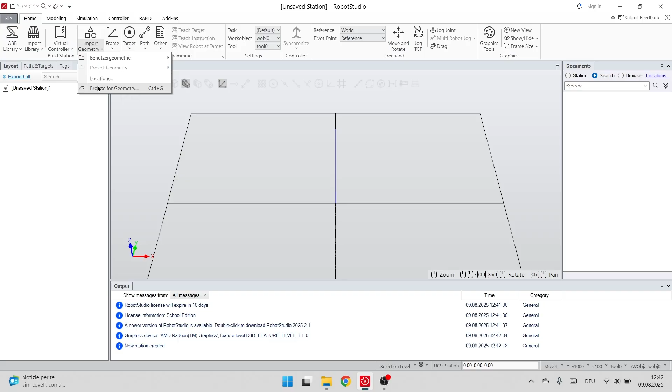In this video I will show you how you can create your own gripper. So let's create a station. Then you have to download the gripper from Sakai in the resources folder, and then we go to the import geometry here. Then browse for geometry. It's this one here, it's a .sat file, and open.

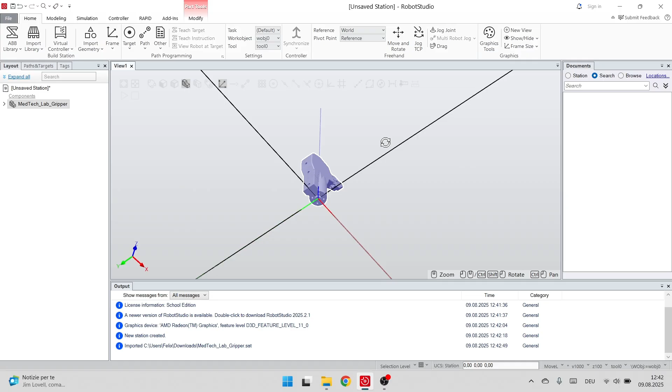For this gripper, the orientation of the origin is already right from the file itself, but maybe when you create another gripper, you have to adjust the origin as well. You can see how that is done in other videos, how to create libraries.

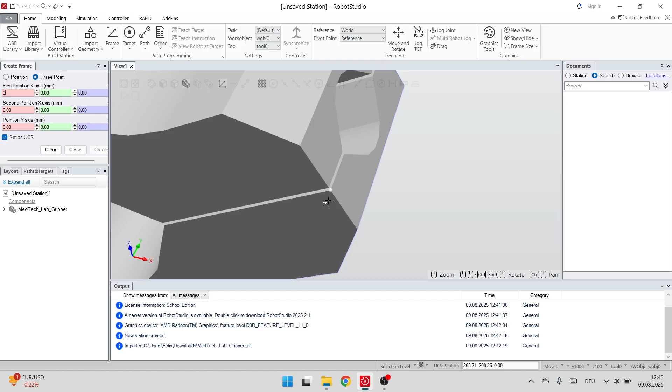Then we will create a frame from 3 points, and we will make the TCP1 first. So let's zoom here, 3 points, and we select this here. And now we want the x-axis to point downwards and the z-axis to point outwards. So this is the x-axis and this is the y-axis. Create.

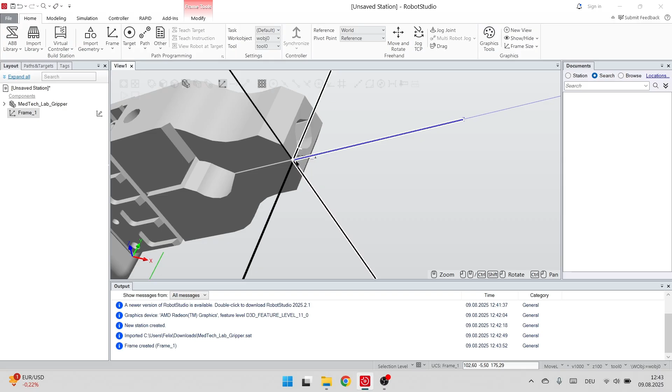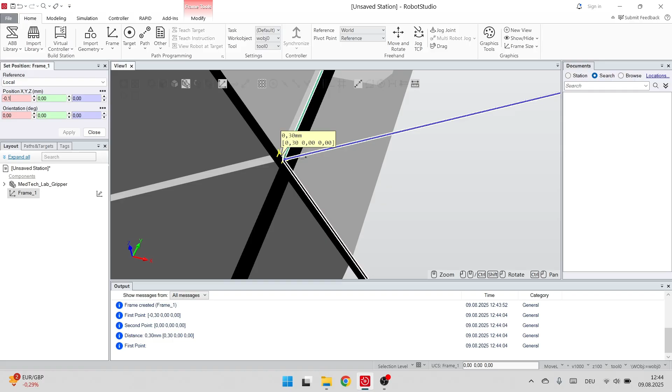Okay, now we have to adjust the position. Let's measure how far these two are apart from each other. It's 0.3 millimeters, so we have to move the frame in the negative x direction by minus 0.15. Apply, and now it's in the middle.

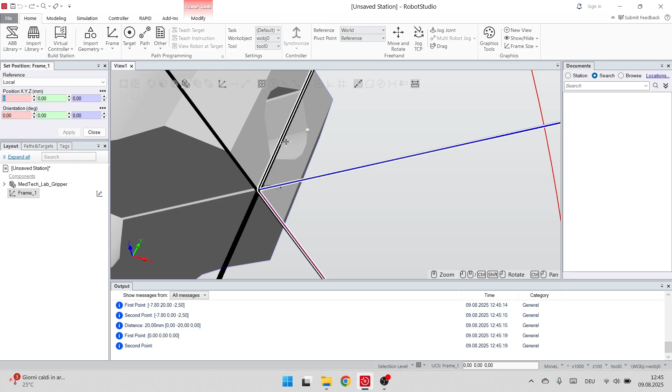So the fingers, let's measure how wide the fingers are. They are 20 millimeters. So let's move the frame into the positive y direction. We choose local because we want to move in the coordinate system itself, and here 10 millimeters, and apply. So now the TCP1 is in the right place, and let's move on to the TCP2.

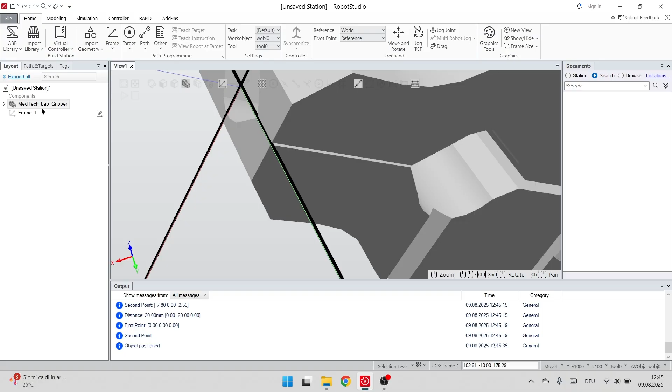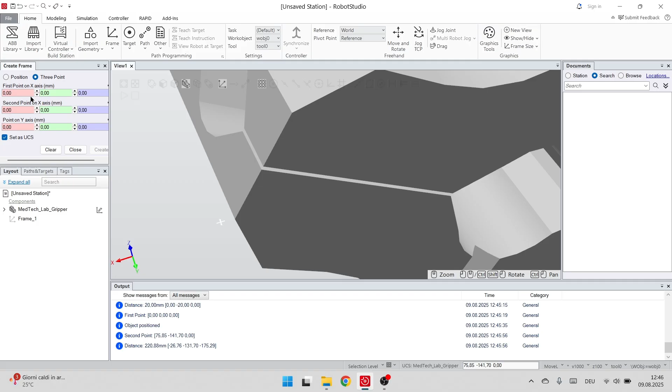I will hide this one here so it's easier to see, and put this as UCS. Okay, then create again a frame from 3 points, and in this case we want the z-axis to point in this direction and the x-axis to point down. So again, x-axis, and the y-axis, I don't think we can do that, so we have to rotate it later.

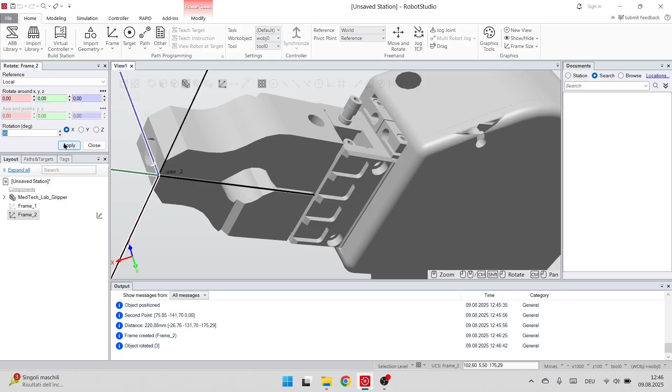So now we rotate around the x-axis for 90 degrees in this rotation. Okay, then we have to move it up again into the middle, so that's again minus 9.5 here. And now let's measure. Make sure you have activated the frame as a UCS.

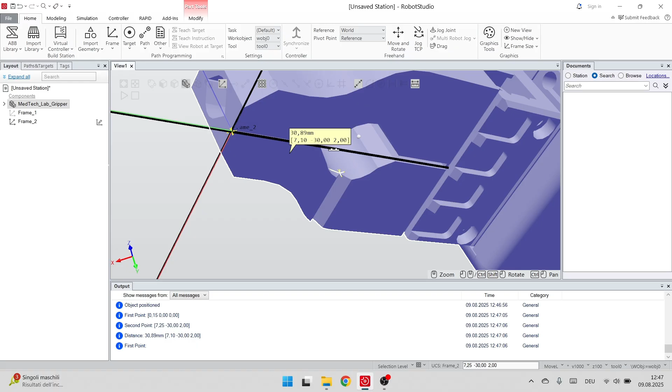And now let's measure from here to here, and we can see it's minus 30 in the y direction. So we have to move the coordinate frame minus 30 in the y direction. Again, local minus 30. Apply. And now you can see here

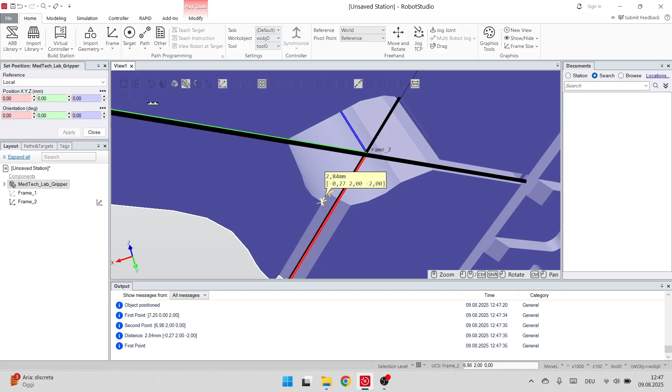this is exactly where the x-axis should be, and this is 2 millimeters inward here, but we will measure it here. Now you can see it's 2 millimeters, so we move it into the z direction 2 millimeters. Okay, and go here again, and 2 millimeters here. So now also this is in the right position. And now we will move on with creating the TCPs.

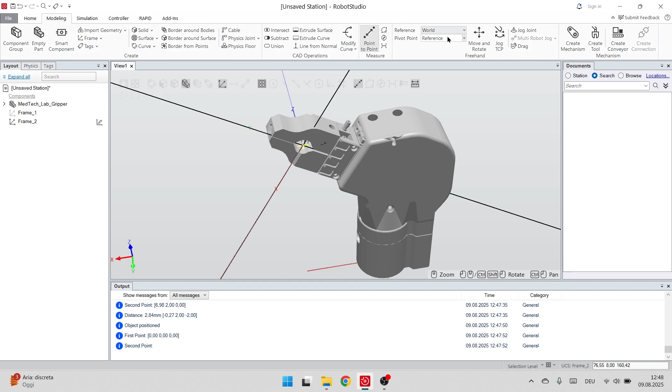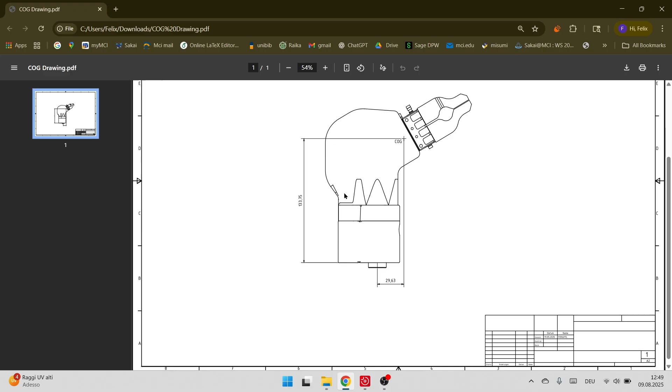So go here to modeling and create tool, and give it whatever name you want. And use existing, and this one here, the mass is approximately 0.4 kilograms. For the center of gravity, we can look at the drawing. You can download that one as well. And this one here. And here you can see the center of gravity.

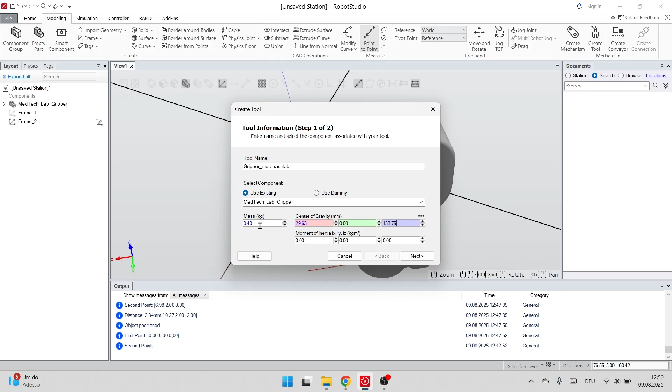So it will be 133.75 millimeters in the Z direction and 29.63 in the X direction. So 29.63, I guess it was. Let's see again. Yes. And 133.75. This doesn't matter so much because the mass of the gripper is just 0.4 kilograms, but maybe if you use a heavier gripper, you have to pay attention to this.

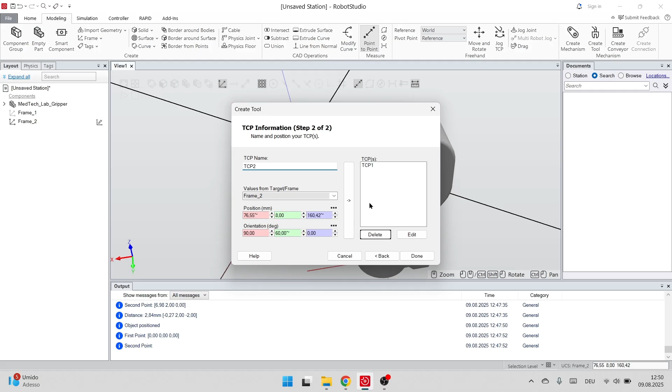So now the frame 1 is the TCP1. Let's call it TCP1 here and move it here. And now TCP2 and frame 2 and move it also here. Now done. And we can delete the 2 frames here. And you can see the 2 TCPs right now. And now we can save this as a library.

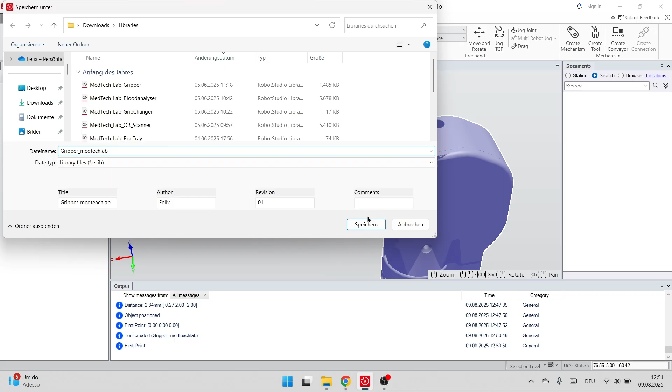And let's save it with the right name and wherever you want. And now you have the gripper. So we will open a station now with the robot, and I will show you how you can mount it to the robot. Or let's do it in this station.

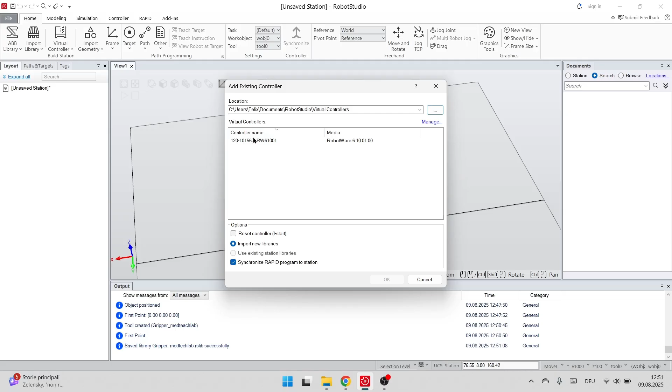From existing controller and the IRB120. Then choose any one of those. And the controller is started. And now go to import library, browse for library. And now we can see this is the one we created.

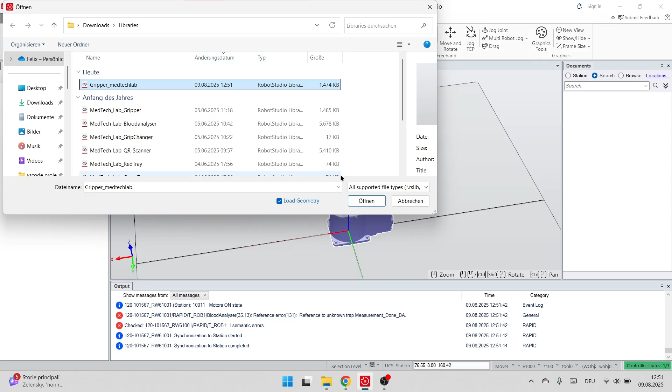And now it's here. And just by pulling it onto the robot, we can move it to the tool 0. And yes, we want to update the position. And now the robot has its own gripper.